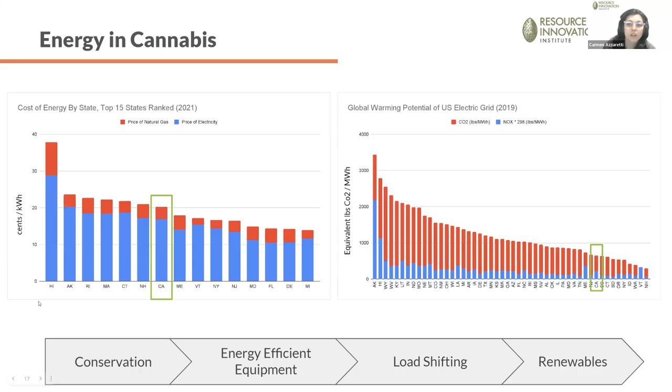Now I'm going to hand it over to Scott real quick to talk a little bit about reading your bills and understanding your electric charges for PG&E specifically. Thanks, Carmen. Yeah, I'm just going to very briefly talk about some of the key components of the electric bill. And then further on down in the presentation, we'll dive in a little bit more. But here are the three key components that we need to keep in mind when we're talking about energy charges, and that's your demand charges, your energy charges, and time of use.

So your demand charges generally cover those fixed costs for generation, transmission, distribution, and so forth. We speak of these in kilowatts or kW. Energy charges cover the variable costs, more or less, the power that's consumed. And we talk about this in terms of kilowatt hour or kWh. And then last is time of use.

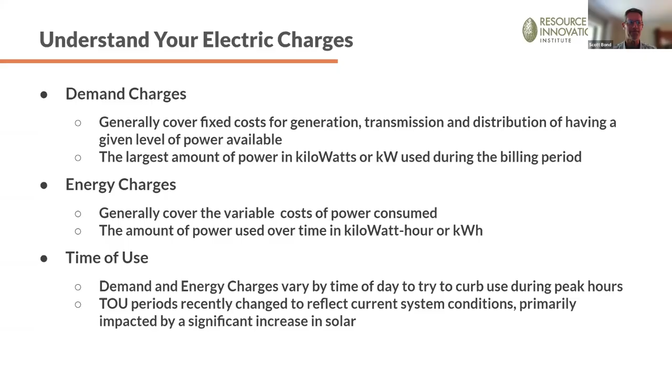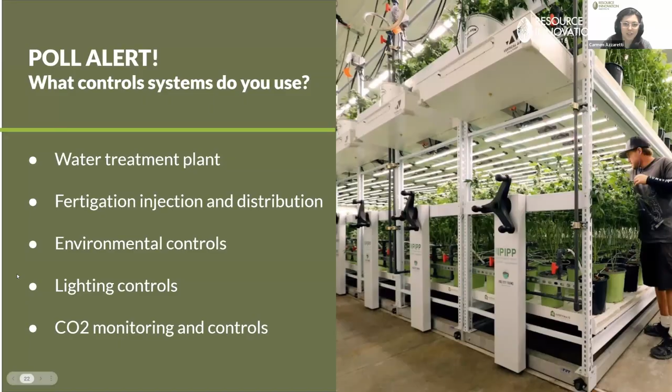So I'm going to hand it over to our ARCO team, starting with Sultan, to talk about planning and management. But let's kick it off with a control system question. Now, this can help you refine your energy consumption and energy use. And Sultan will talk a little bit more about that, and why it's important. But here on out, Sultan. Yep. Thanks, Carmen. So yeah, I'm looking forward to seeing what control system the audience uses. And then I will start to kick off the planning and management section.

It is important to start by determining your goal, and in order to plan ahead in the right way when it comes to energy and consumption, first we need to understand the type of facility we are working with and the type of spaces within this building or facility. Since we are here to talk about energy and peak load, understanding the type of these facilities will help us understand and predict our energy consumption to assist in reducing peak loads and selecting an efficient power solution.

So for this presentation, we will be touching on our generic approach of how to understand your energy needs to select your best on-site power solution. And we will be focusing more on controlled environment agriculture facilities, which are unique and generally have higher power demands than what a utility or a client may be used to seeing.

It's important to understand the power that your facility requires, and it's also important to understand your power rates, and this will help you know your grid capacity to guide you on how you should plan in using and managing your facility. I will let Sam add more points on how to understand your building energy requirements.

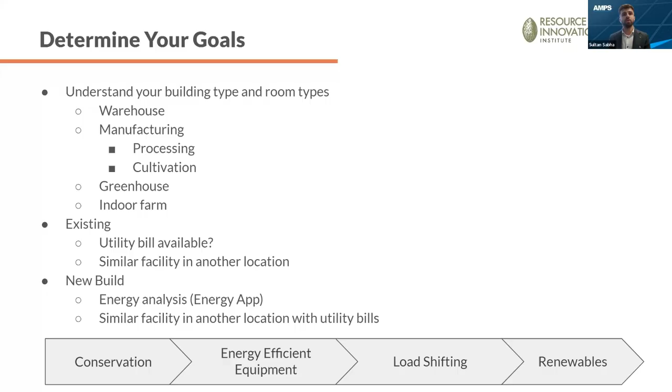And then for a new build, first we try to understand the consumption by comparing it to an existing facility with the same energy usage. You want to have a facility that has the same mechanical or electrical equipment, and try to size that facility to your current facility that you're trying to study. Another way, which is commonly used at our company Power Solution AMPS, is the 8760 load profile that we can obtain through our energy app. And I'll be talking about that now in this slide.

So when talking about greenhouses and grow farms, modeling the operation of your facility can be extensive. The equipment and processes all interrelate and react to different factors: growth and harvest schedules, solar gain, temperature, humidity, and many other factors. The interrelation requires that you view your facility needs on an hourly basis, and that's where 8760 comes in handy. So you have 365 days a year, 24 hours. This is where you get your 8760 load profile. Knowing your hourly demand, you can now understand your consumption. By doing so, you can also find a way to shift your load in order to reduce the peak demand and shift your equipment load schedule to your off-peak hours.

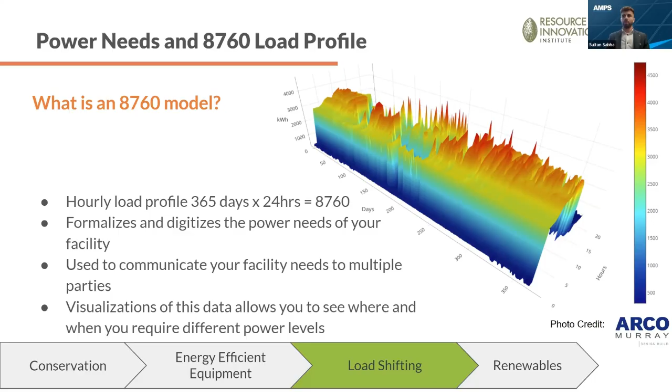Moving on to the next slide. And the 8760, to summarize, will help you understand your power needs by predicting your consumption and presenting your hourly energy usage and behavior, which ultimately helps you predict your energy OPEX, provides data to the utility to help understand if there's enough capacity to interconnect to the grid, and helps to understand your energy demands. It also helps in sizing your power generation system and gives insights on alternative energy generation.

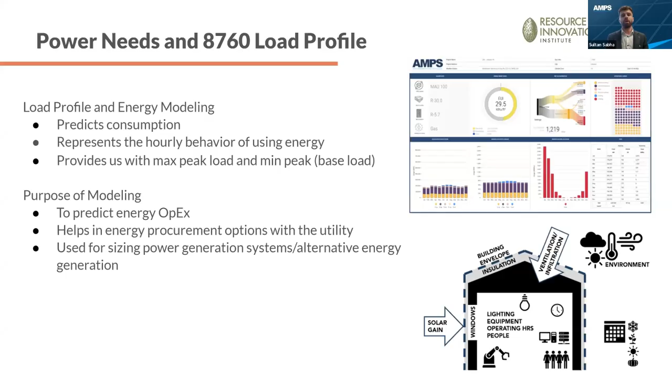Now moving on to the 8760 load profile and rate structure. Another thing we take into account when generating our 8760 energy study is incorporating the utility rate based on the location and utility provider info. So utility rates are not constant and can have large fluctuations in prices, especially related to peak demand. Each utility is different in their rate structure. Your peak usage defines your rate group, which sets your rate structure.

Applying the rate structure to the 8760 will result in an accurate estimate of your electric bill and will be a great start to exploring your energy procurement options. I will let Scott from PG&E chime in here and discuss the rate structure, and then Sam will take it over and talk about energy management.

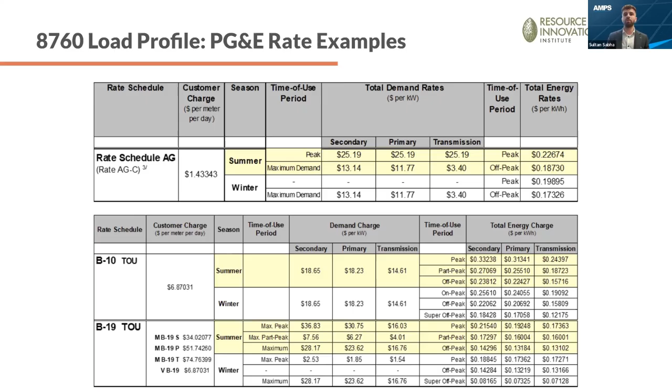Great, thanks, Sultan. Could you go back one more slide there, Carmen?

And I just wanted to share two examples of rate schedules that you'll see in the CEA world. The first being ag, the second being the mid-size industrial commercial rates. And it's complex. There's no way to get around it, and more reason to understand it, to dive in. Go to pge.com, your account, and examine your usage, your bills.

Well, it looks like most of you are really familiar with your bills. If you have any questions, reach out to your account manager, and we could do our best to help you understand it. I won't delve into the details on this, so let's go to the next slide there, Carmen.

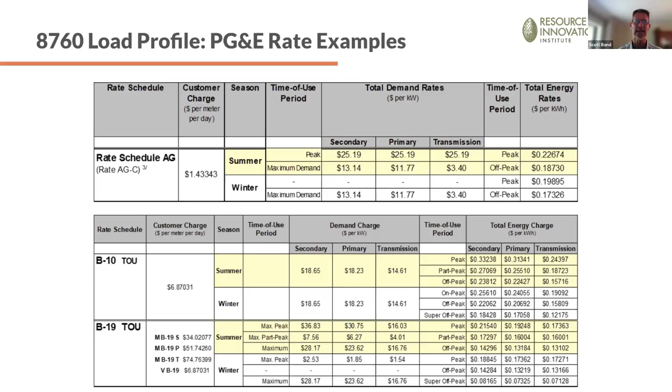And this will show, I'm sure you've all heard, a couple of years ago, we switched our time of use periods. Historically, summer has been 6 months, and peak hours happen 5 days a week, not 7, and so forth. So what we've done in response, largely due to the amount of solar that's providing electricity to the grid, is we've changed it and shifted the peak hours from noon to 6 to either 4 to 9 or 5 to 8, depending on the rate. Summer is now 4 months, not 6, and so forth.

So make sure you understand what your time of use periods are, whether they're the commercial industrial, the B19, the B10, B20, or the ag. Ag is much more simple these days and poses a great opportunity to avoid peak demand charges because it's only 3 hours a day. So again, if you want to figure out how to optimize your operation to minimize your costs, reach out to your account manager, and we'll do the best we can to educate you and work with you on that opportunity.

Back to you, Carmen. Actually, back to Sam.

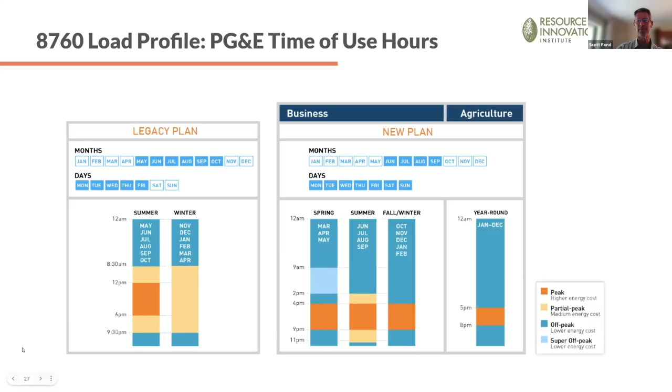To me. Thanks, Scott. Yeah, so jumping in here to strategic energy management. So we want to put forth a strategic energy management plan. That's the recommended approach to consider all things energy for your facility. So that begins with conservation, as Carmen had mentioned earlier. Creating a culture of conservation is paramount. Like Carmen said, if you don't use the energy, then there's no need to be efficient with it. The best case to reduce energy is to use less of it.

So conservation is first and foremost, and there are programs available to try and spread that education and that awareness. As Scott mentioned, PG&E is willing to help, and every other utility provider that you would have would do the same. So, creating a culture and a process that enforces conservation is really the first step in energy management.

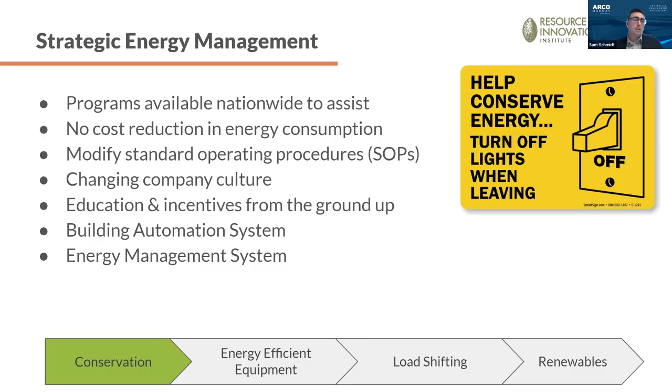The next thing I want to touch on this slide is looking at your energy consumption in terms of metrics. Can you jump back real quick, Carmen? Just looking at your yield in terms of a kilowatt hour or your yield in terms of square footage. And then comparing that kilowatt hours to square footage as well is a way to create a baseline, a reference point. And so then you can almost compare each harvest cycle to the previous harvest cycle.

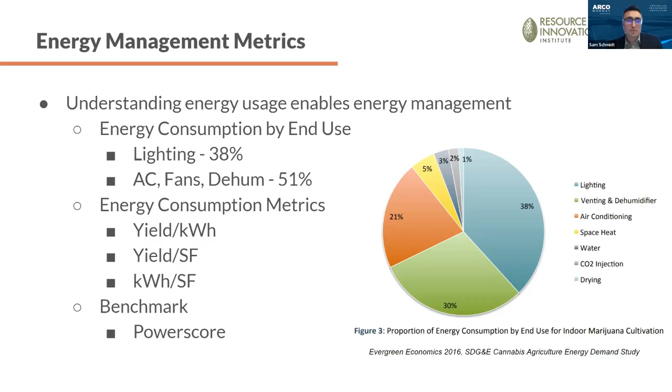And even set goals, right? So creating a baseline is a way to make sure through data, you're able to maintain your goals and hit your energy targets. So quick plug there to benchmark. RII has a great tool called Powerscore, and it will assist with some of these energy consumption metrics and benchmark your facility.

So from conservation, creating that culture of conservation, and now identifying areas to focus our energy efficiency, I'd like to touch real quick here on energy efficiency investments, right? So starting at the top, LED horticultural lighting is definitely something to consider if you have an existing building with metal halide or HPS lighting. LED fixtures are a great method of improving your energy efficiency. There's also something to be said about integrated HVAC systems that have a chill water system and a hot water system, right? As you grow and scale your cultivation facility, there's a tipping point where a packaged HVAC system may not make sense, and it may be more efficient to use a chill water system and a hot water system.

There are other items on this list here to consider, right? Heat recovery chillers are a great option when you have that 4-pipe system in place. Another method would be heat exchangers, right? So using your return air to sort of preheat after you dehumidify is a method of transferring air and reusing heat. So these are all great items here, right? Energy curtains in a greenhouse, things to consider when approaching energy efficiency from an investment standpoint, right? So from new construction, these are definitely great items to consider. In an existing building, when you're approaching end of life on some of your equipment, right? Again, another place to come look at replacements.

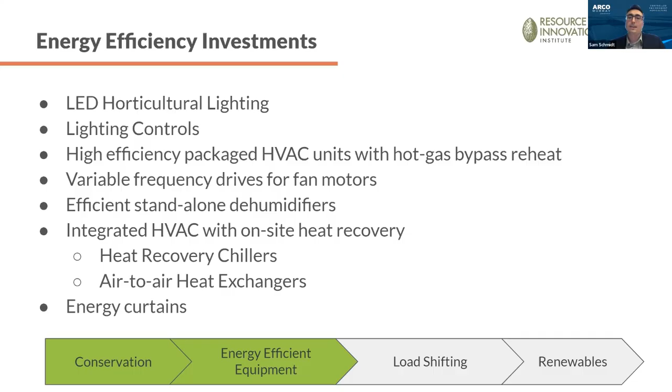And then, lastly, to plug PG&E and some incentives, right? When you're looking at your facility and how can you improve your efficiency, right? Always keep in mind that there are incentives on the table that can help you with the capital expense from these investments, right?

So jumping onto the next slide, we're going to touch on load shifting here, right? So these would be cost-saving investments rather than energy efficiency investments, because you're not going to be reducing your energy usage, but you'll be shifting when you use that energy. And as Scott touched on, with time of use pricing and peak demand having a different rate on peak versus off peak, it can be valuable to shift your loads off peak in terms of cost, right? So a few methods to do this outlined on this slide here. And having an integrated control system is a great way to allow you to implement those different programs to allow you to shift your loads, right?

So staggering a room startup, there's a little chart on the side there. Operating rooms on a flip schedule. If you have 2 rooms on rather than 1 on and 1 in a night cycle, and then you flip those, right, your peak demand would accumulate with both rooms being on. Whereas if you operate on that flip schedule, your peak demand is just going to be the 1 room on. So that's a quick snippet, but you can see how staggering your rooms can quickly shift your peak load.

I touched on a 4-pipe hydronic system, right? So, one method is using thermal storage and generating chilled water, maybe in an ice storage overnight, to then shift your chilled water usage from daytime to nighttime to shift that usage away from those peak demand charges. And that's a great way to have some cost savings. But again, it isn't reducing your energy consumption.

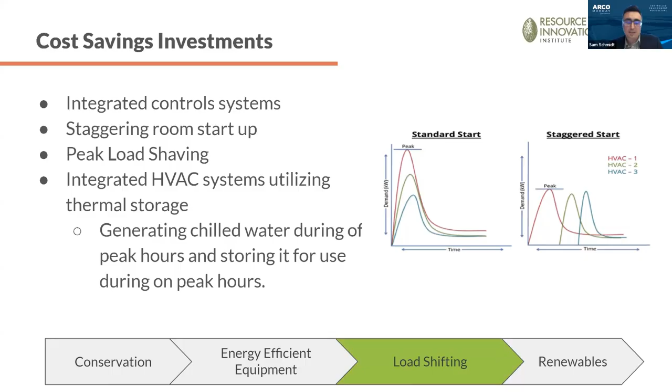If you want to do a night airflow setback, that is a method of reducing your energy at night, and can be achieved just through a building automation system on your computer, right? So investing in a building automation system can unlock some of these control strategies that really will improve your energy efficiency. On top of that, we can touch on fault detection and diagnostics, right?

Continuously monitoring your system, right? We go back to metrics and KPIs and identifying, hey, this month we're using more energy than we did last month. We should look into this, right? So, monitoring-based commissioning comes into play for that case, right? To continuously monitor your usage and your consumption, identify anomalies so that you can investigate into your facilities and identify something went wrong here or something's not operating as it should be, right?

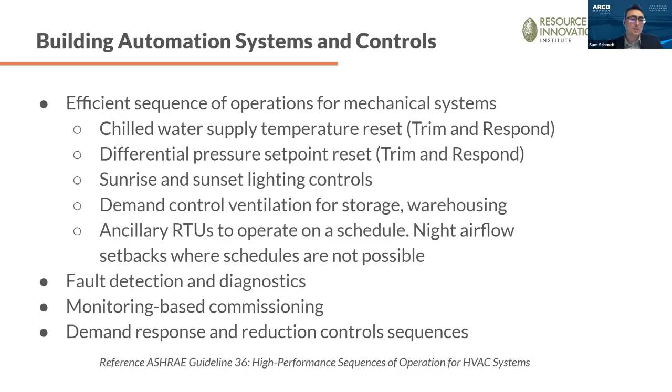Cool. Thanks, Sam. And now we'll move on to on-site energy solutions. So let's start with answering this question. What do you guys think is the most efficient on-site energy production method? We'll discuss the results at the end of this section. Cool. Okay. So there are different types of on-site power solutions. In this section, we'll touch on solar, battery, CHP, and microgrids.

So again, referring back to planning and management, the first thing is that you need to understand your goals in using these power solutions. Are you planning on offsetting your energy with a renewable source? You want to go green, or your goal is shaving your peak demand, reducing your electric bill. In the selection process of your power solution, you would need to understand that there are different factors and variables you want to look at.

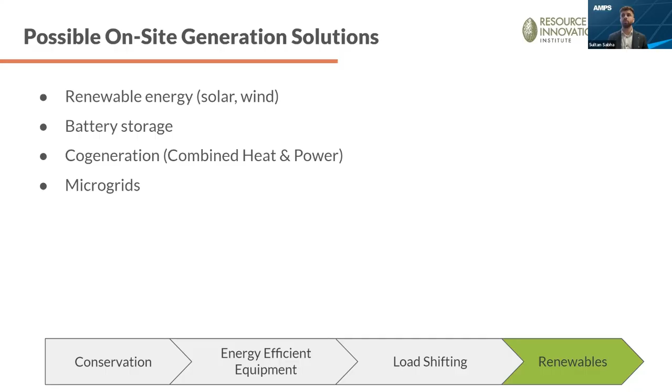For example, the climate you are in. Does it make sense to have solar? Is it sunny enough, right? Are there incentives available? What utility programs are available for different power options? This will help in narrowing down your options and help you decide which solution makes more sense to use and utilize. So in the next slide, I'll be talking about solar and CHP, as this is AMPS' expertise.

So for solar, now in California, Title 24, as of the start of 2023, requires all new buildings to have solar and battery, and that is based on your conditioned floor area or the SARA, which is the solar access roof area. And part of planning and management is that you need to plan ahead when it comes to solar. You need to make sure your roof can structurally withstand the dead load and lateral load added from the solar system. And you want to make sure your electrical infrastructure can interconnect the solar system.

Per NEC, National Electrical Code, if you are planning on having a load side connection, you'll be limited to 20% of your service size. If you want to have more solar, let's say, you don't want to be limited by your service size. So you can have an interconnection to the supply side of your service. So this might be easier for new construction, where you can have a section added to your service and the supply side. So to summarize, basically, you want to plan ahead and weigh your options.

For an existing building, you need to see if you need infrastructure upgrade. For a new build, you can incorporate those to the design and make sure you check those requirements before deciding on having solar. Again, so solar can be grid tied, front of meter, behind the meter, supply side, load side connection. It can be off the grid. It can be connected to a battery system. So now let's talk more about battery, right?

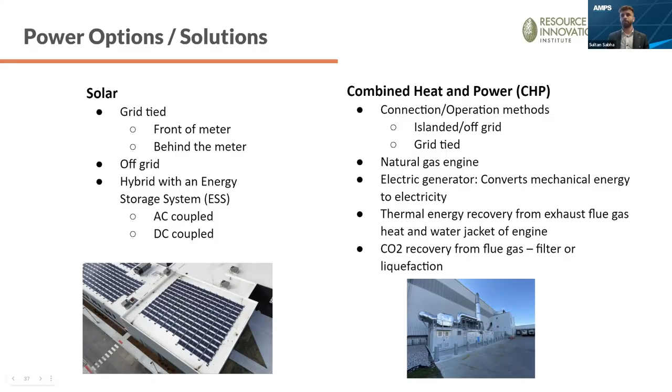Now moving on to the next slide. So we want to talk about preparedness here. Let's talk about power outages and how you can have a solution for this power outage. There's multiple solutions you can look into. You can look at generators. You can look at CHP as a backup. You can look at battery as a backup. And then what is important here is to understand how you want to size these power options.

So this will be determined based on your goals of the facility, right? Are you trying to offset your entire facility when there's an outage, or are you trying to offset your critical loads of the facility? So you need to define the main components of the facility; this needs to be part of your planning. You also want to know your backup duration so you can size your backup solution correctly. I would like to mention that PG&E has some programs for generators and batteries that we'll be talking about in the utility and state program section later on.

And I will let Sam here talk briefly about microgrid, as he's a controls expert. Sam, you're muted. Thanks, Sultan. Sorry about that.

Yeah, just real quick, a microgrid manages your on-site loads, right? So it'll continuously monitor your building demand in order to prioritize your energy generation equipment to meet that building demand. Your microgrid can also be used to enable a generator and therefore provide some grid stability for the microgrid that you operate on.

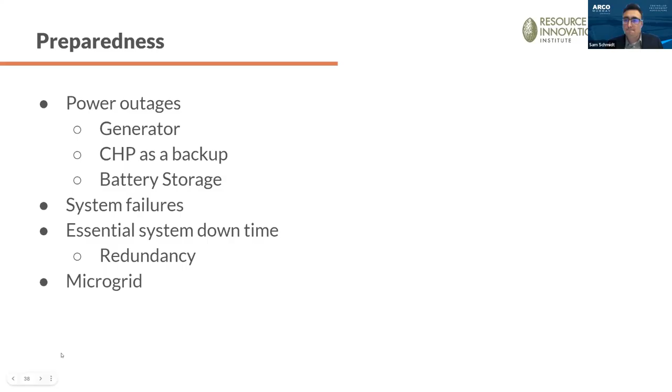Cool. Thanks, Sam. And one more thing I want to touch on is something that is called redundancy. It's also important to know that sometimes your backup option is not working. Let's say your backup is a CHP. You can have another CHP on site that is backing up your CHP, and that's called redundancy. It's a commonly used solution when you want to avoid system failure. I just wanted to touch on that.

And then finally, the last thing I would like to touch on is financial analysis, and it's important to look at your power solution as an investment. We as design builders are here to help evaluate different power options and show how adding this power solution can be a good investment, and which power option makes more sense based on your different goals. Are you aiming for a good ROI and payback period? Does this system need more infrastructure upgrades? What does that look like in terms of adding this power solution to your facility, to your site, and which one makes more sense based on your goals?

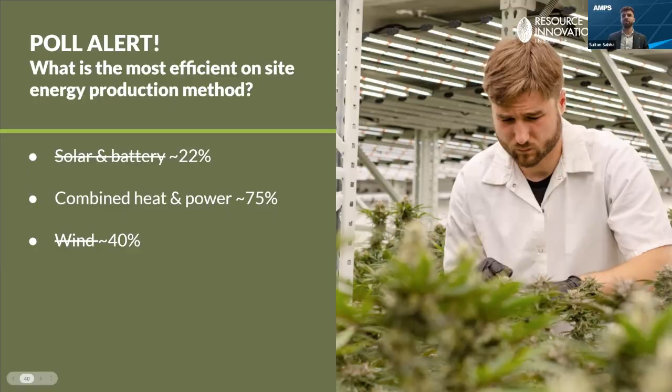And now we'll move on to see your answers for the first question we had for this section. So most of you got the right answer. Probably people selected solar and battery because there is a battery here, but I think the intent here was just solar by itself. Solar is now ranging around 22%. CHP is between 60 and 80, most commonly 75%, and wind is 40%. So CHP will be the winner here. And then we'll move on to PG&E and the utility and state programs.

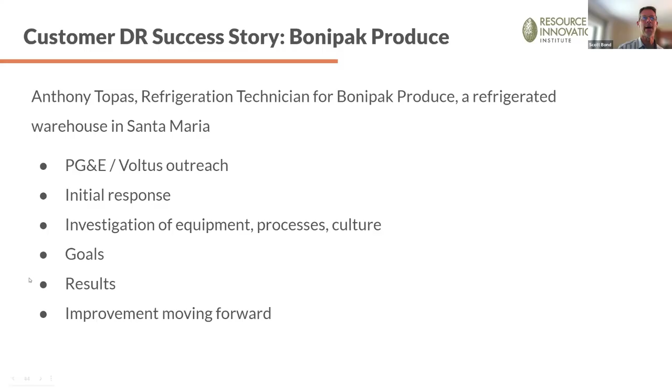Yeah, and I'm really thrilled that we have a lot of opportunities for you to save money and get incentives if you implement some of the strategies that we've talked about today. With the self-generation incentive program, we encourage people to install batteries. It helps reduce greenhouse gas production, and it supports our grid. We also incentivize generation technologies, including thermal and mechanical storage, wind, fuel cells, internal combustion engines, microturbines, a pressure reduction turbine, or a linear generator.

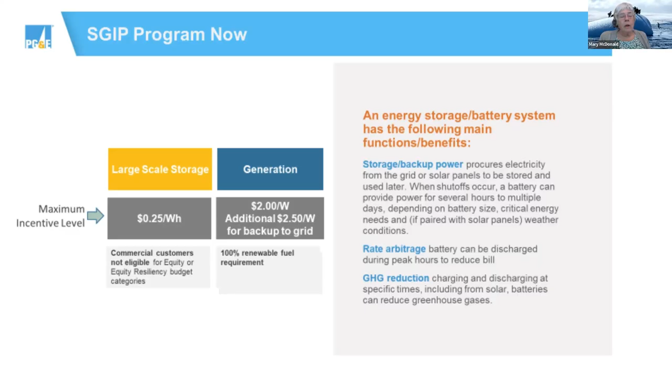Oh, just real quick, for that generation, if you do use a fuel, there's a requirement for 100% renewable fuel to be used. Next slide. All right. We also have a slightly smaller program where eligible customers can get a $300 rebate on the purchase of either a portable generator or a battery.

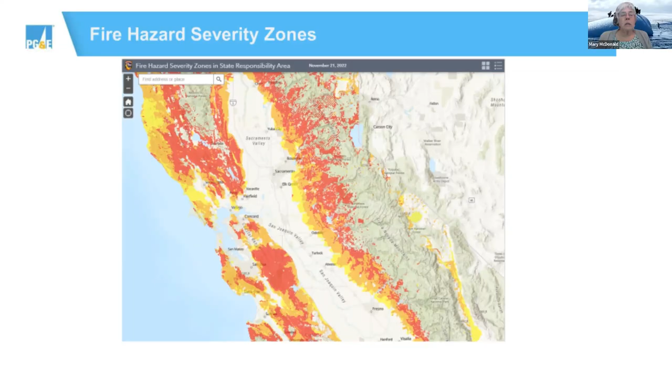And on the next page, this is a map of fire hazard severity zones. So you can see where there's the red and the dark orange. Those are the zones where you're going to qualify for this program. So basically, if you're in the Central Valley, probably not. If you're on the outskirts of the valley, it's worth checking with the folks to see if you are in a high fire hazard severity zone.

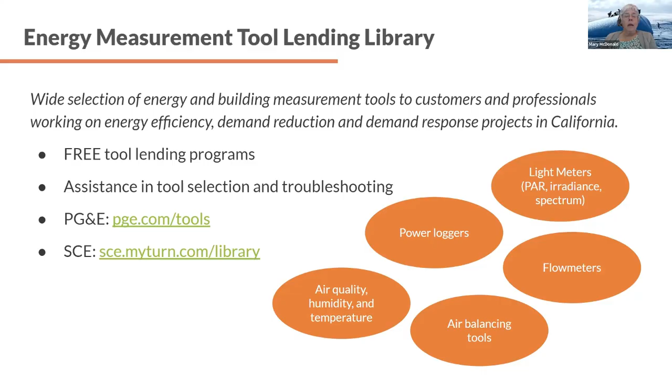And if you are not comfortable with your data analysis, I can take your data and graph it in about 5 minutes to help give you a picture of what's going on. So I'm happy to help. So that's us at pge.com/tools. In Southern California, Edison has a similar library, but smaller. And so there is their website.